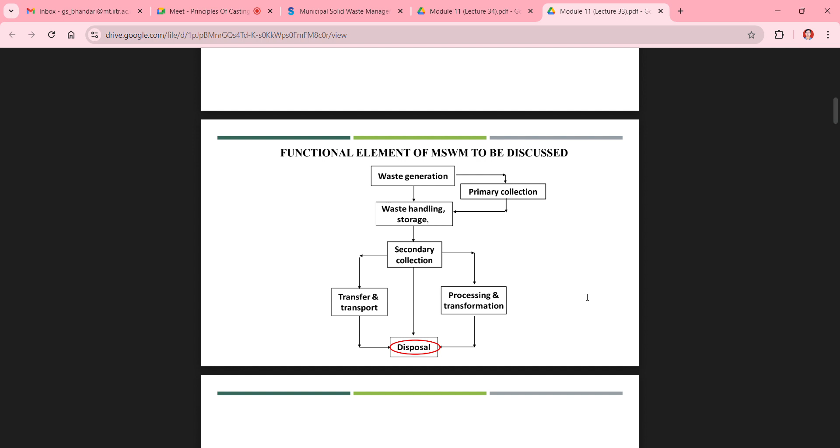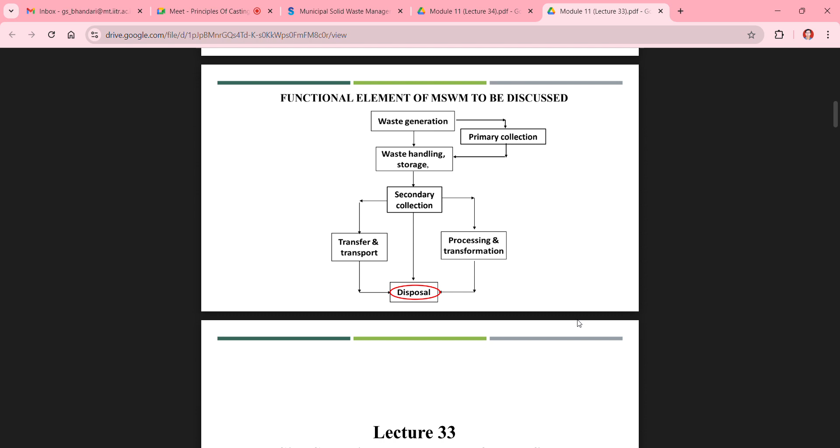So where are we going to dispose this waste? Obviously we are going to dispose it off in a landfill, because after the processing steps, it does not contain any useful material inside these wastes. So we will go for the landfilling of this municipal solid waste. For landfill, we need a site, and for site selection, we have to consider different factors before deciding the site for landfilling of municipal solid waste.

First, we will talk about the history of solid waste management in India. In earlier days, the solid waste was dumped in unoccupied land stretches, or we were burning the waste in the open so that it can be destroyed. But the problem with burning these wastes is that it will produce some greenhouse gases, and it will cause air pollution during the burning process.

In 1994, large scale flood due to heavy rain and clogged sewers resulted in a plague epidemic in Surat. Due to these hazardous health conditions, the philanthropist Almitra Patel filed a PIL in the Supreme Court, and that resulted in the formation of the Barman committee to improve solid waste management in the country. The Barman committee submitted the report to the Ministry of Environment and Forest, which introduced the special act of Municipal Solid Waste Management, known as Rules 2000. After that came the SWM Rules 2016, which is in practice nowadays.

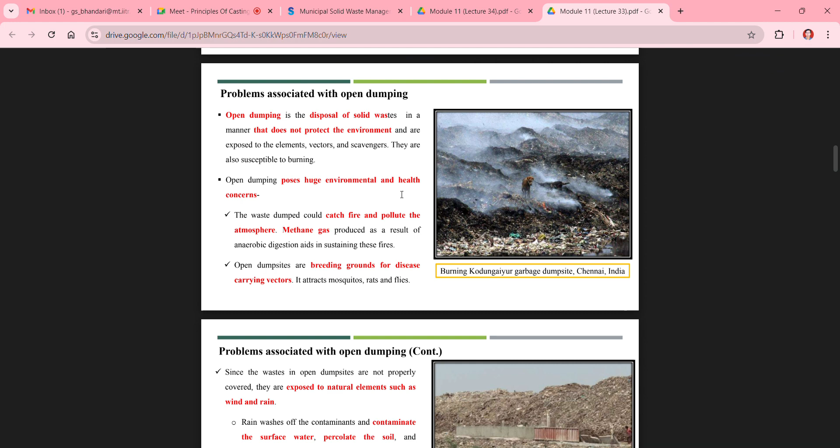There are many problems associated with open dumping of solid waste. Open dumping is a disposal of solid waste in a manner that does not protect the environment, and the waste is exposed to elements, vectors, and scavengers. It is also susceptible to burning. So instead of open dumping, we need to go for the landfilling of municipal solid waste in a proper manner, so we can inhibit the external vectors, scavengers, and different types of health hazards created due to the open dumping of municipal solid waste.

Open dumping poses huge environmental and health concerns. The waste dump could catch fire and pollute the atmosphere, and it can result in the formation of methane gas, which is very susceptible to fires. Open dump sites are breeding grounds for disease carrying vectors; they attract mosquitoes, rats, and fleas, which can result in different types of health hazards like plague or dengue.

Since the waste in open dump sites is not properly covered, it is exposed to natural elements such as wind and rain. If rain water comes into contact with this municipal solid waste, it will leach out the hazardous elements present in it, and that water will go into the groundwater and contaminate it, which will result in major health problems. Open dumping also decreases the quality of life of nearby residents and the local community.

Coming to the landfill, landfills are physical facilities used for the proper disposal of residual solid waste on the surface of the earth, considering different factors which inhibit health hazards during the disposal of municipal solid waste. A landfill includes monitoring of the incoming waste stream, and placement and compaction of waste so that it can be in a smaller area.

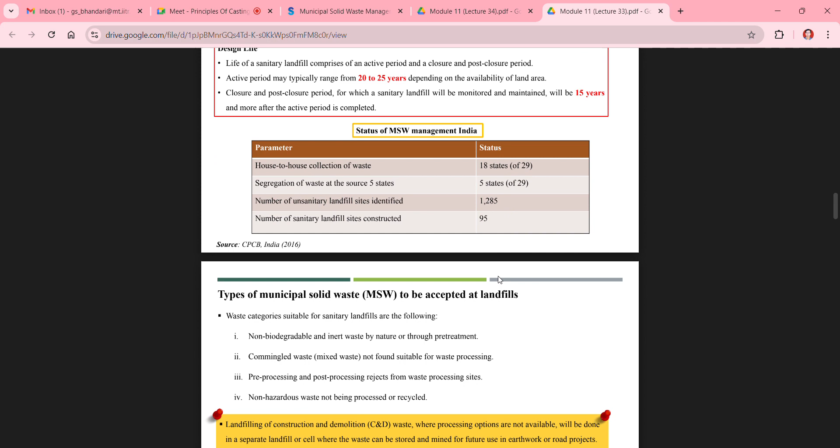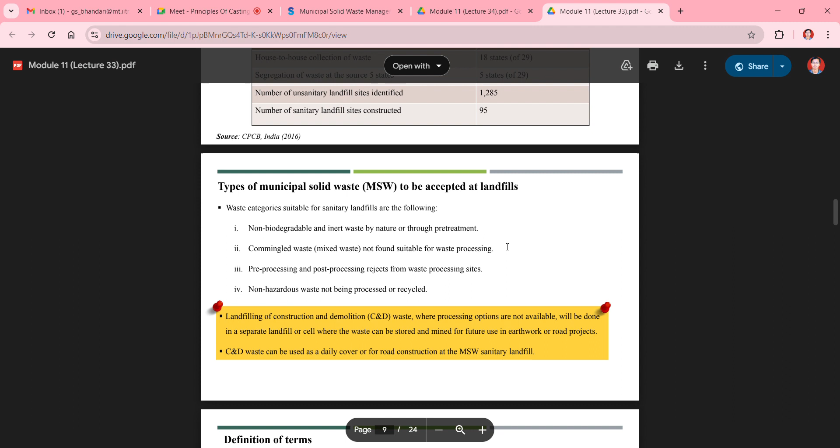Then, the types of municipal solid waste which can be accepted at landfill sites: there are different waste categories suitable for sanitary landfills, like non-biodegradable and inert waste, by nature or through pre-treatment. Then commingled waste, that is basically mixed waste not found suitable for waste processing. Then pre-processing and post-processing rejects from waste processing sites, and non-hazardous waste not being processed or recycled. So these are the different types of waste which can be accepted at the landfill site.

If we talk about non-biodegradable waste, we cannot convert it into biofuels with the help of anaerobic digestion, or into fertilizer material with the help of composting processes. Or there will be inert waste, which cannot be converted into any useful products. So that will go into the landfill sites.

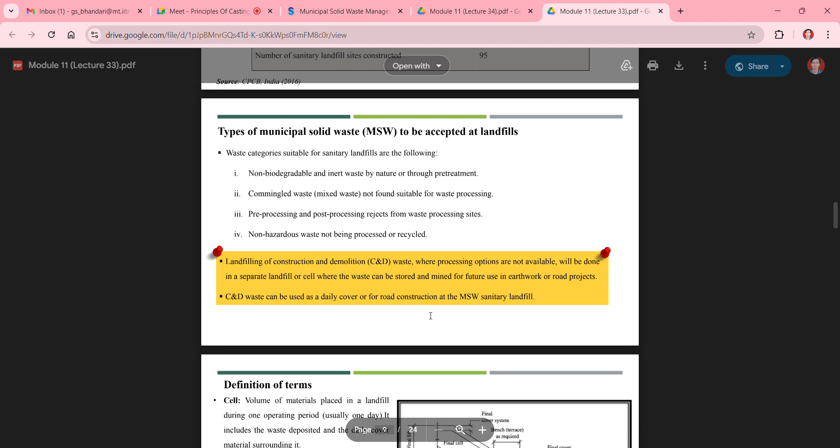Then there will be some pre-processing and post-processing waste rejects. In anaerobic digestion, we were creating reject material after the completion of the process. That post-processing reject will go into the landfill sites, because it is generally treated as inert material. Then non-hazardous waste which is not being processed, or which we were not able to recycle.

Then there are some different terms generally used in the formation of landfill sites, like cell, that is the volume of material placed in a landfill during one operating period, usually 1 day. It includes the waste deposited and the daily cover material surrounding it. So daily we have to fill some material. Okay, so we are going to create a cell.

We will calculate the area required for daily waste disposal, because we know the capacity that will be coming during municipal solid waste handling. So we are going to create a cell for the daily waste disposal, and after that cell creation, we will cover that disposed waste with some linings, so that it cannot come into contact with rainwater or something else which is going to leach the material, or which is going to create odor formation during the landfilling.

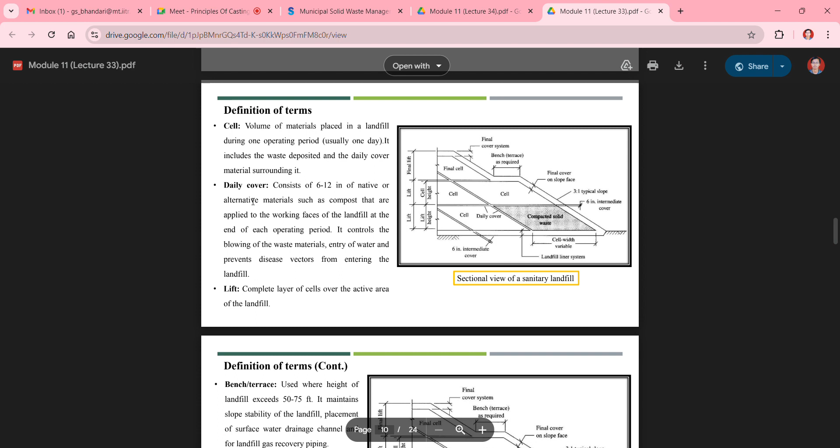Daily cover consists of 6 to 12 inches of native or alternative material such as compost that is applied to the working faces of the landfill at the end of each operating period. After filling the daily disposal, we cover it with the help of some organic material.

It controls the blowing of waste material, entry of water, and prevents disease vectors from entering the landfill, so it cannot come into contact with vectors or water every day. Then coming to the third term, that is known as lift. A complete layer of cells over the active area of landfill is known as the lift.

The lift height is usually around 6 to 7 feet. Another term is bench or terrace, used where the height of the landfill exceeds 50 to 75 feet. It maintains slope stability of the landfill, placement of surface water drainage channels, and landfill gas recovery piping.

As discussed, during landfilling there is no access to air for the waste disposed in the landfill site. Because this waste does not have proper contact with air, if there is some organic amount still present, it will go into anaerobic digestion, converting the municipal solid waste into different gases like CH4 or ammonia. Those gases have to be drained out from the landfill site properly so we can reuse them, prevent odor formation, and prevent major mishaps.

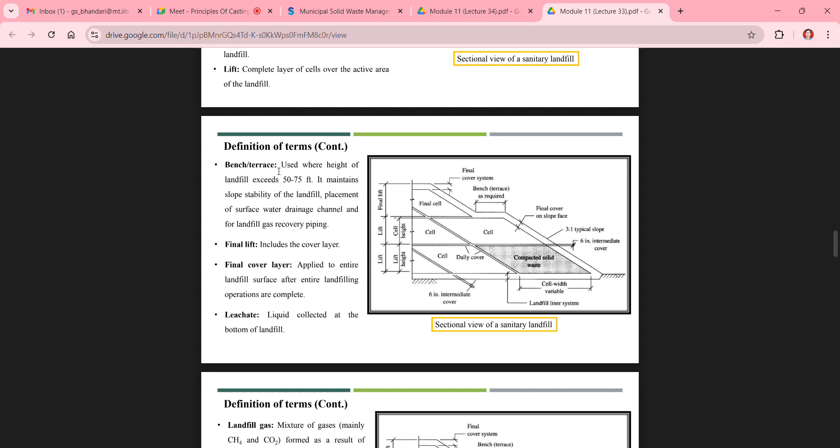The final lift includes the final cover layer, applied to the entire landfill surface after all landfilling operations are completed. We fill a landfill site for at least 10 to 15 years, and after that period, we cover the landfill site with the final cover layer, applied to prevent interaction of the municipal solid waste with rainwater, external vectors, or air.

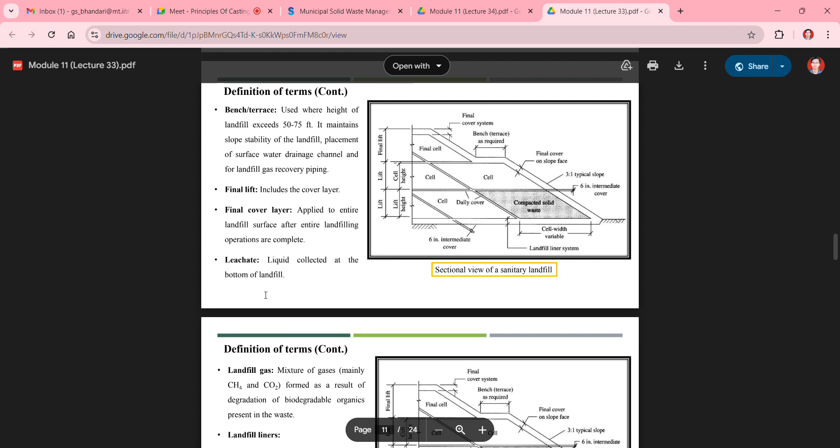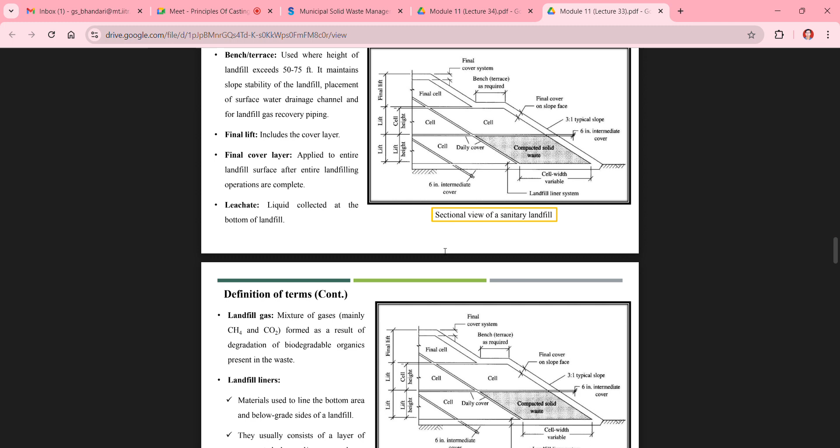Then leachate, which is a liquid collected at the bottom of the landfill. We have to provide a proper system for collection of the leachate material, which forms after the reaction of municipal solid waste with rainwater.

Then landfill gas, which is mainly a mixture of gases, mainly CH4 and CO2, formed as a result of degradation of biodegradable organics present in the waste material.

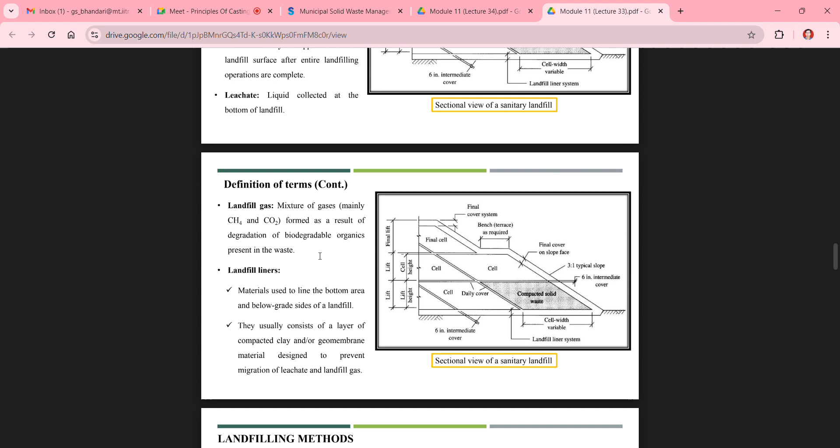Hello, Vasanta, you want to say something?

Coming to landfill liners, these are materials used to line the bottom area and below-grade sides of a landfill. They usually consist of a layer of compacted clay and/or geomembrane material designed to prevent migration of leachate and landfill gases into the groundwater.

If they transfer into the groundwater, they will contaminate it and create major health hazards. There are different types of landfilling methods, three in total: excavated cell or trench method, area method, and canyon or depression method.

In the excavated or trench method, this type is generally used where the groundwater table is not near the surface. Trenches are dug and lined with synthetic membrane liners like geomembranes, low permeable clay, or a combination of both, so the leachate water does not get in contact with the groundwater.

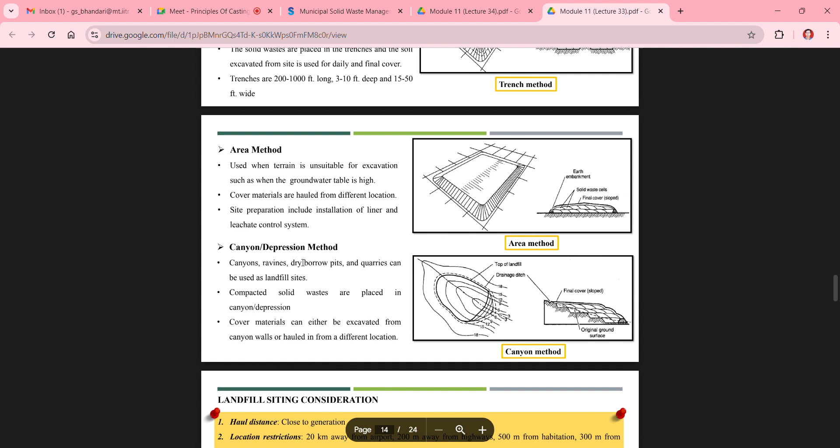Okay, then in that case, we have to go with the area method. In area method, the cover materials are hauled from different locations. Site preparation includes installation of liner and leachate control systems.

The third method is canyon or depression method. Canyons, ravines, dry borrow pits, and quarries can be used as landfill sites, and compacted solid waste is placed in canyon or depressions. In this method, you don't have to dig. You fill the waste material into a naturally available canyon, ravine, or dry borrow pit. Cover materials can either be excavated from canyon walls or hauled in from a different location.

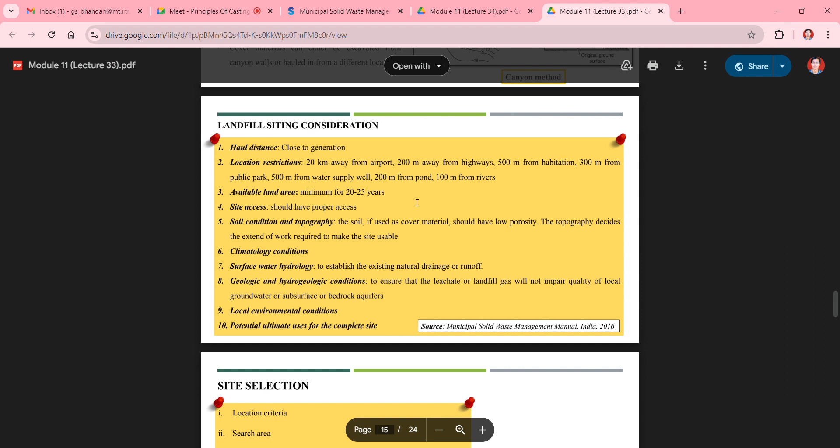There are some factors which need to be considered while deciding a landfill site. Haul distance has to be close to the generation site. Then location restrictions: it has to be at least 20 kilometers away from airport, 200 meters from highways, 500 meters from habitation, 300 meters from public park, 500 meters from water supply well so it cannot contaminate the groundwater, 200 meters from pond, and 100 meters from rivers.

Then available land area, that has to be sufficient for at least 20 to 25 years, because a landfill site will take at least 20 to 25 years to properly fill up with municipal solid waste material. And after that, you also have to monitor that landfill site for at least 10 to 15 years more. Then site access, it should have proper access to the road.

So that transportation can be easily done. Then soil condition and topography: the soil, if used as cover material, should have low porosity, and the topography decides the extent of work required to make the site usable.

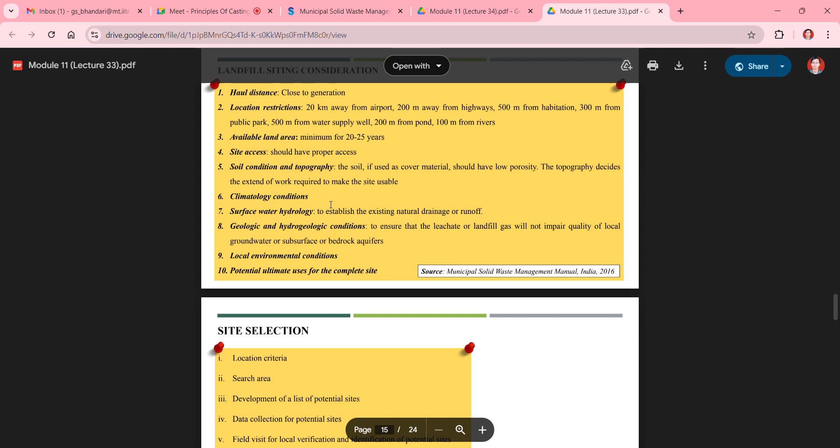Then we have to take into consideration some climatology conditions, surface water hydrology to establish the existing natural drainage or runoff, and geologic and hydrogeologic conditions to ensure that the leachate or landfill gas will not impair quality of local groundwater or subsurface bedrock aquifers.

Then we have to take into consideration some local environmental conditions, and potential ultimate uses for the complete site. Because after landfilling, once 25 to 30 years are over, we cannot leave that site as it is. So we have to consider the potential ultimate uses of that complete site after the landfilling process is over.

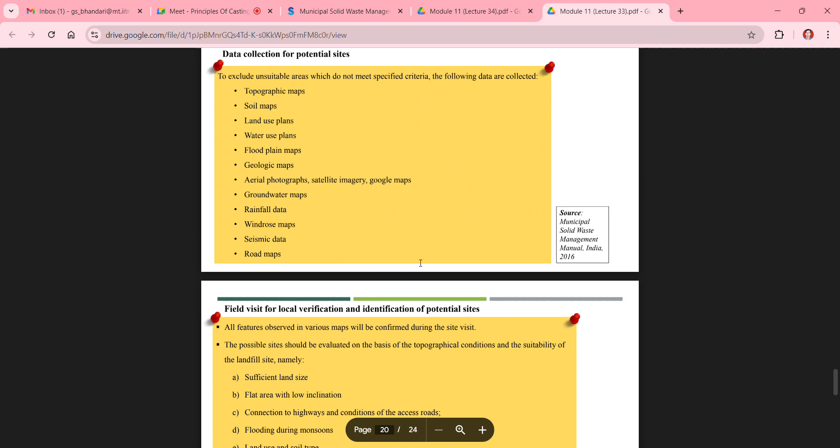We have already discussed these things: search area, data collection for potential sites, field visits.

Sir, can you please zoom in a little bit on the PPT? It is okay now. Yes, sir, it's fine. Okay.

We have talked about the different types of landfill sites and what factors we need to take into consideration while deciding a proper landfill site. After deciding the proper landfill site, we also have to install the leachate collection and gas treatment systems in that landfill site for the proper disposal of the leachate and the gases produced during the landfilling of municipal solid waste.

There are two most common problems associated with landfill sites. One is landfill gas. Organic material such as wet waste is usually compacted when put into landfills, and due to improper oxygen content, that organic material goes into the anaerobic digestion process. This anaerobic digestion process results in the production of CO2 and CH4 gases during landfilling, which have to be properly captured at the landfill site.

Otherwise, these gases are a major part of the greenhouse gases and will create a major greenhouse effect and major air pollution. So we have to properly create a system for the capture of these landfill gases. There are two major advantages after capturing these gases: one, we are inhibiting air pollution and the greenhouse effect; second, the major content of these gases includes around 60 to 70% methane gas, which can be reused as a biofuel material for different purposes.

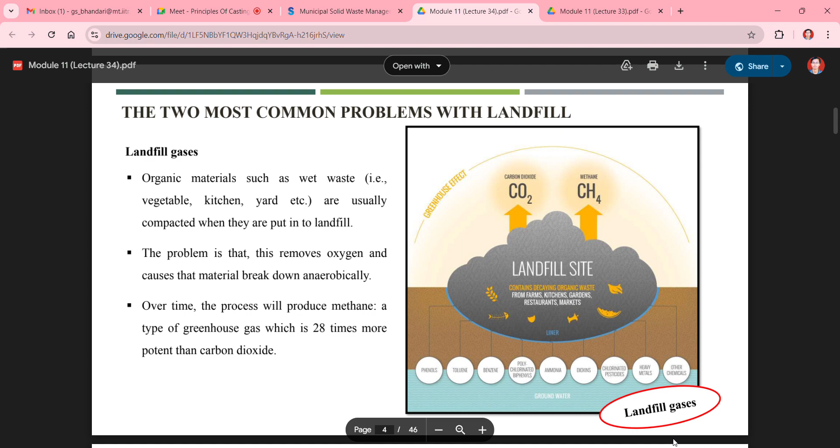After the capture of these gases, we can provide some economy also, after selling these gases.

There will be some complex reactions which will occur during the landfilling of these sites, like hydrolysis. These types of reactions we have already discussed during the anaerobic digestion process. So these organic materials first go into the hydrolysis process, followed by fermentation, and then acetate formation. After acetate formation, that acetate again decomposes into CH4 and CO2 gas formation. So the same reactions which were occurring during the anaerobic digestion process will occur in these landfill sites.

Typical phases of landfill gas and leachate: as we increase the volume, there is first phase, second phase, third phase. In the third phase, the stabilization gas production will be at maximum. We have plotted the stabilization gas production with respect to the gas composition, percent by volume, and chemical oxygen demand.

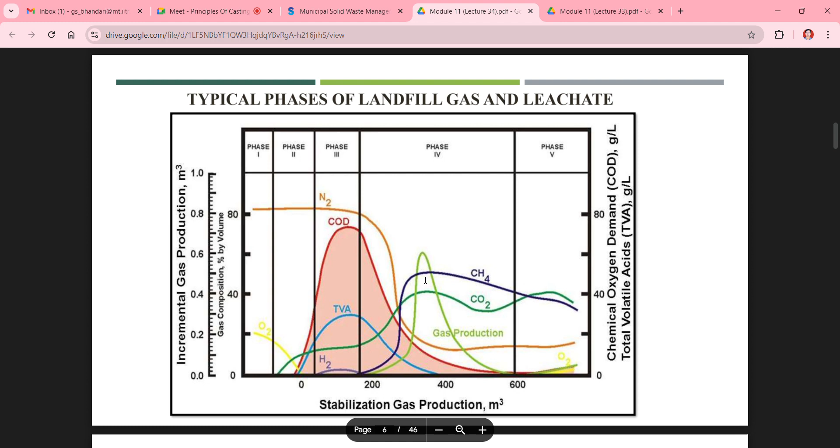The CH4 gas production can go up to a maximum of around 400 meter cube, at a gas composition where a maximum CH4 content of 45 to 50% can be achieved.

Then there are different factors which influence the leachate generation process during landfilling. Leachate varies widely depending on the age of the landfill, type of waste, and composition of that waste material—whether it contains non-biodegradable material or heavy metals. Heavy metals are easily leachable with rainwater, so that composition plays a major role in the leachate composition.

Then what are the environmental conditions, like temperature? In Delhi, the maximum surrounding temperature near landfill sites can go up to 49 or 50 degrees, and inside the landfill it can be around 80 or 90 degrees Celsius. In a landfill site in Jammu and Kashmir, maximum surrounding temperature can be only 30 or 40 degrees, and inside the landfill it can go up to around 50 or 60 degrees Celsius. So temperature plays a major role during leachate operations.

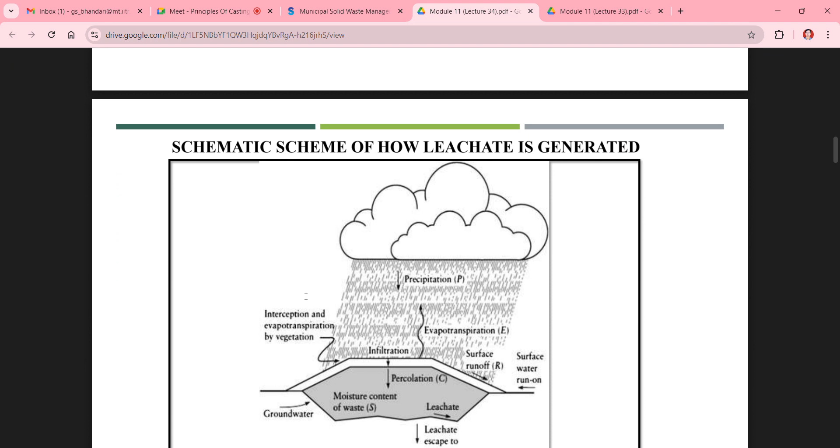So this is a schematic of how leachate is generated. Here we can see rainfall, or we can say precipitation. This rainfall is going to infiltrate into the landfill site. Then there will be percolation, then moisture content of waste, and it will create the leachate.

And some leachate can escape to the environment, like into the land, into the soil which is on the bottom side of the landfill, some will be collected as surface runoff, and some will go as leachate.

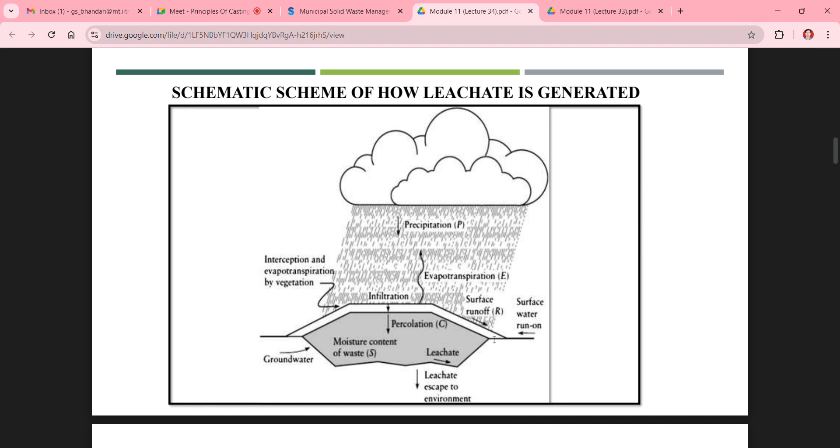Okay, so there are different factors that will influence the leachate quality, like refuse composition. Quality variation is higher for putrescible waste than for non-putrescible waste. Then elapsed time: leachate quality varies with time. In general, overall quality of leachate generated in 1 year will be less strong than previous years.

Then ambient temperature, which will affect both bacterial growth and chemical reactions during the landfilling. Then available moisture, because water plays a significant role in biodegradation and subsequent leaching of chemicals out of a waste. Then precipitation: the amount of rain falling on the landfill influences the leachate quality significantly.

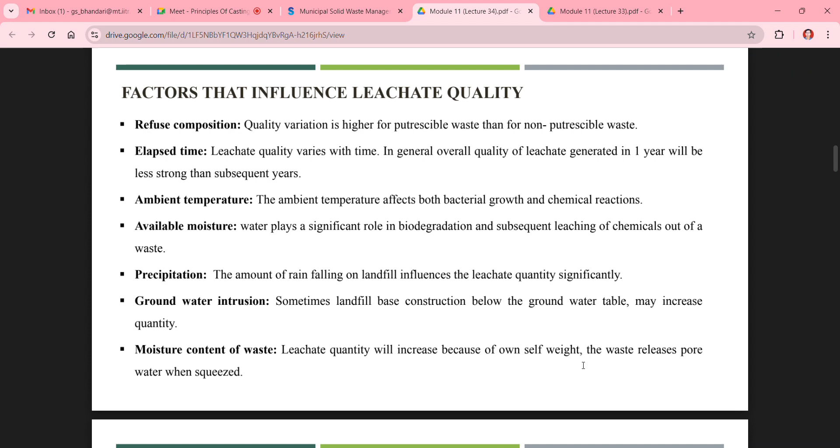Then groundwater intrusion: sometimes landfill base construction below the groundwater table may increase the quantity of the leachate. Then moisture content of waste: leachate quantity will increase because of own weight. The waste releases pore water when squeezed.

Sir, what is the meaning of refuse composition? First point, leachate quality, like putrescible waste and non-putrescible waste. I didn't understand. It's like we have already talked about the decomposition processes of the solid waste. Municipal solid waste contains different categories. It can contain inert waste from the construction industry, dry leaves, inert waste like dirt sweepings from the streets, or kitchen waste.

Okay, so what types of different content are coming into that refuse composition. If we are going for the composting process, or the anaerobic digestion process before going for landfilling, that will decide the refuse composition. So if it is going to contain inert waste material, that inert or hazardous waste will contain some heavy metals.

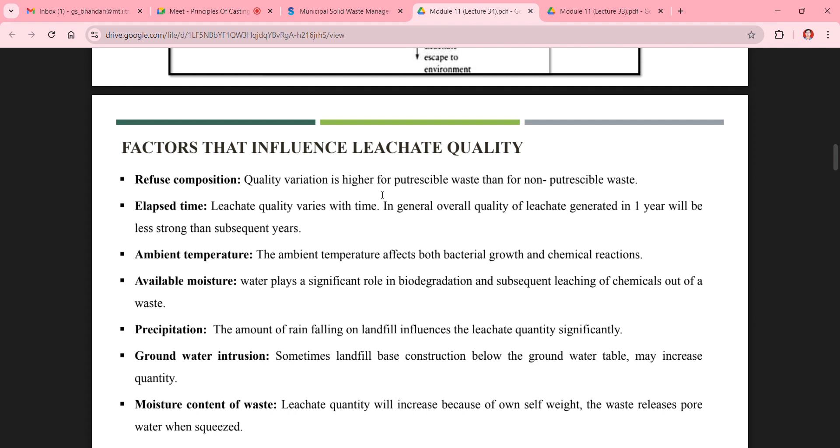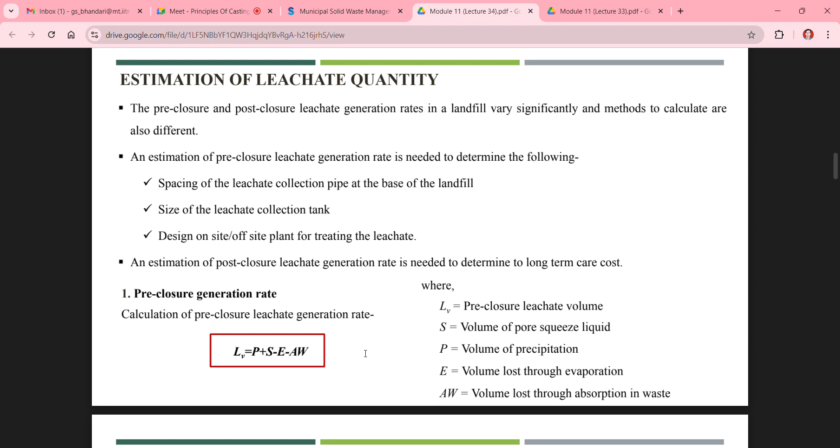Okay, so with the monitoring of that leachate quality or the gases generation during that tenure, we will be able to decide if we have to finally close that landfill site or not. Okay, on the basis of the leachate quality or quantity, we can decide the time period of the closure of

that landfill site. Then post-closure generation: after the construction of the final cover, only the rainwater can infiltrate into the waste and generate leachate. Five approaches are available to predict the long-term leachate generation rate. So after the post-closure, okay, so pre-closure, like we have talked about, pre-closure time period of around 15 years, then post-closure time period of around 10 to 15 years.

So after the pre-closure tenure is over, 15 years of the landfilling is over, we will provide a proper membrane, or we can say a proper cover, on that landfill site. So that after that proper covering of that landfill site, only a small amount of rainwater will be able to infiltrate inside the landfill site to generate the leachate.

Okay, most of the rainwater will fall off from that geomembrane only, because we are providing that geomembrane over the landfill site to prevent the moisture absorption after the pre-closure period of landfilling. So there are 5 approaches which are available to predict the long-term leachate generation rate. That is water balance method, computer modeling in conjunction with water balance method, empirical equations, mathematical modeling, and direct infiltration measurements.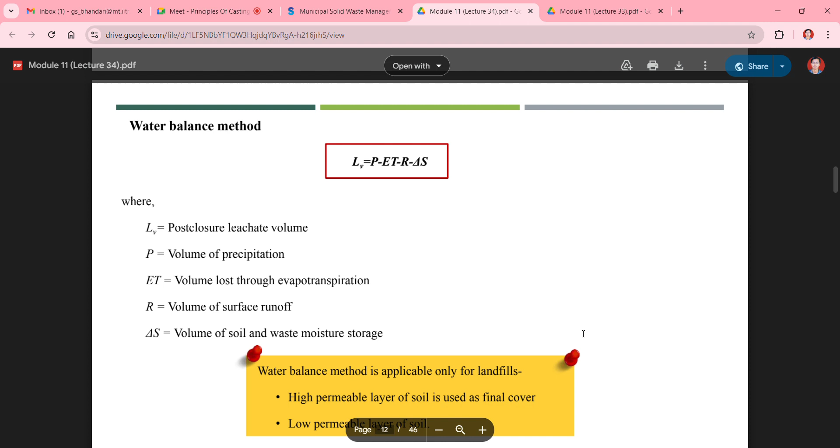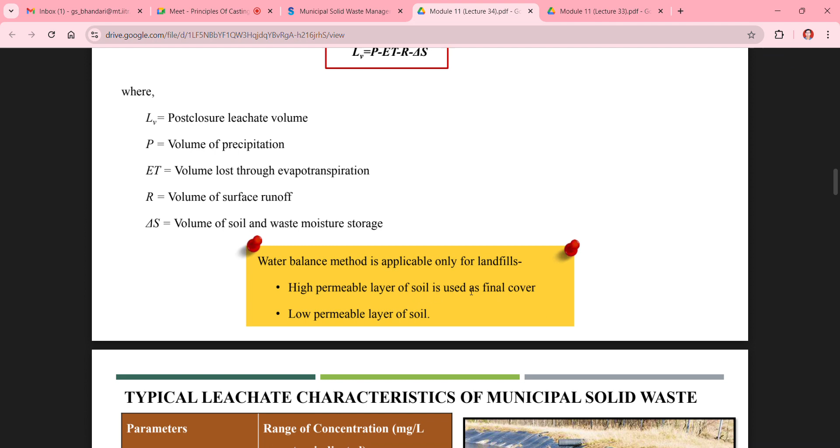Then coming to water balance methods, an empirical formula is Lv equal to P minus ET minus R minus delta S. So Lv is post-closure leachate volume, P is volume of precipitation, which is decided with the help of the rainfall. Then ET is volume lost through evapotranspiration. Then R is volume of surface runoff. Delta S is volume of soil and waste moisture storage. So water balance method is applicable only for the landfill sites which have a high permeable layer of soil as a final cover, or low permeable layer of soil.

Then typical leachate characteristics of municipal solid waste: the pH value of that typical leachate will vary from 3.7 to 8.9, and electrical conductivity will be in a wider range, around 480 to 72,500 microsiemens per centimeter. Then biological oxygen demand will vary from 0 to 1,95,000. Then chemical oxygen demand will vary from 6.6 to 99,000. Iron content will vary from 0 to 4,000 ppm. Potassium content 0 to 3,200 ppm, and magnesium content will be around 4 to 780 ppm.

Then we can see a leachate is flowing through a pipe in a sanitary landfill site. So we have created a pond for the leachate collection. Then this leachate will be treated in this pond before going for the proper disposal of this leachate content.

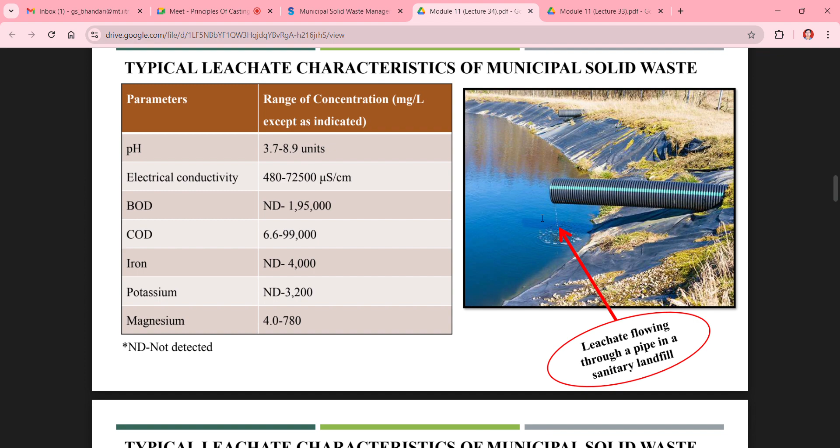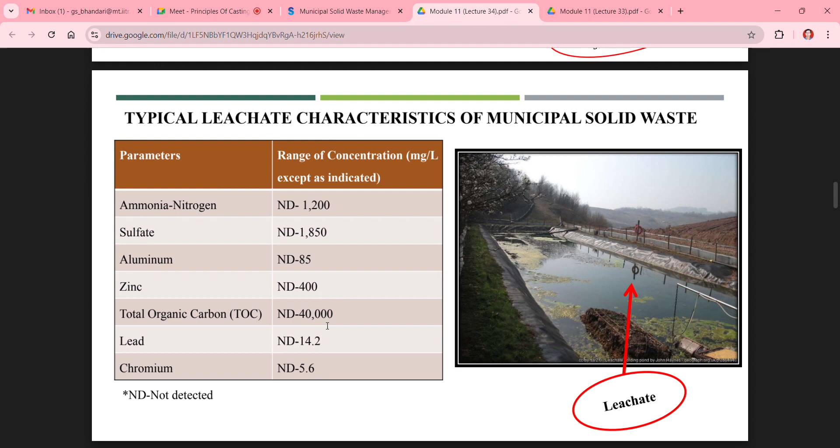So this is continuation from this typical leachate characteristic. The ammonia or nitrogen generation will be around 0 to 1200 ppm, sulfate 0 to 1,850. So these are different numbers which can vary according to the municipal waste characteristics. Whatever type of municipal solid waste is landfilled, the characteristic of the leachate will depend on that municipal solid waste quality.

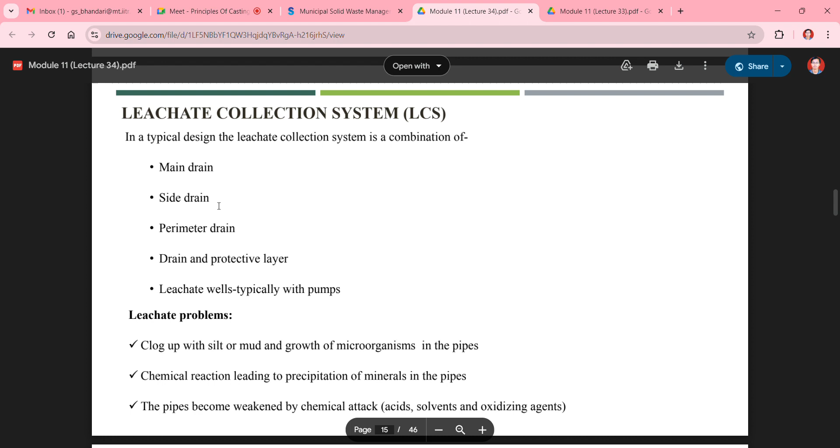Then coming to leachate collection systems. So a typical design of the leachate collection system is going to be a combination of main drain, side drain, perimeter drain, drain and protective layer, then leachate wells, typically with pumps. So there are different leachate problems: leachate can clog up with silt or mud and growth of microorganisms in the pipes, or chemical reactions leading to precipitation of minerals in the pipes.

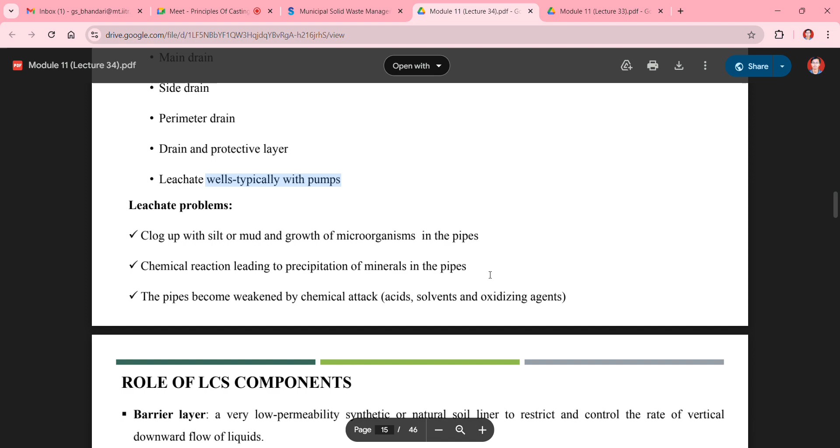Okay, so we have talked about the formation of the magnesium, iron and potassium content. So what will happen? These metals can precipitate in the pipes which are required for the leachate flow from the landfill site. So that will create the clogging up of the material inside these pipes. The pipes become weakened by chemical attacks like acids or solvents or oxidizing agents.

Then role of LCS. So there are different roles of these LCS components. First one is barrier layer, a very low permeability synthetic or natural soil liner to restrict and control the rate of vertical downward flow of liquid. So this layer will be provided on the top of the landfill site. That is very low permeability synthetic or natural soil liner, which will restrict and control the rate of vertical downward flow of liquids.

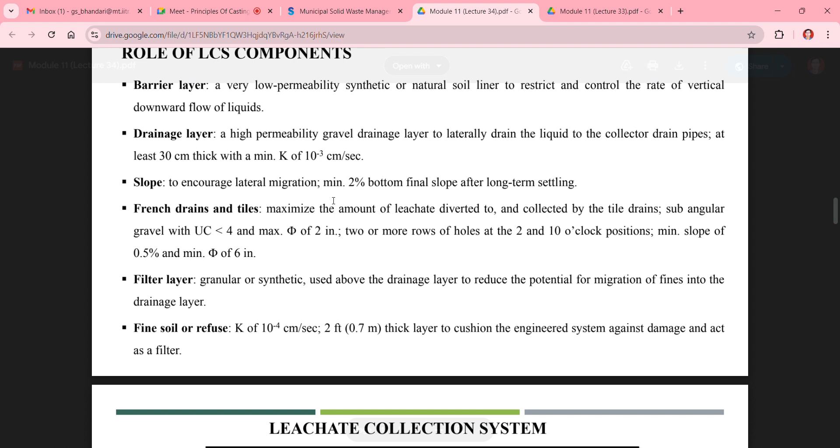Then drainage layer, a high permeability gravel drainage layer to laterally drain the liquid to the collector drain pipes, at least 30 centimeter thick with a minimum K of 10 to the power minus 3 centimeter per second. Then slope to encourage lateral migration, minimum 2% bottom final slope after long-term settling. Then French drains and tiles which will maximize the amount of leachate diverted to and collected by the tile drains, subangular gravels. So these are the design process of a landfill site. In that way, we have to properly design a landfill site to create a proper leachate collection system.

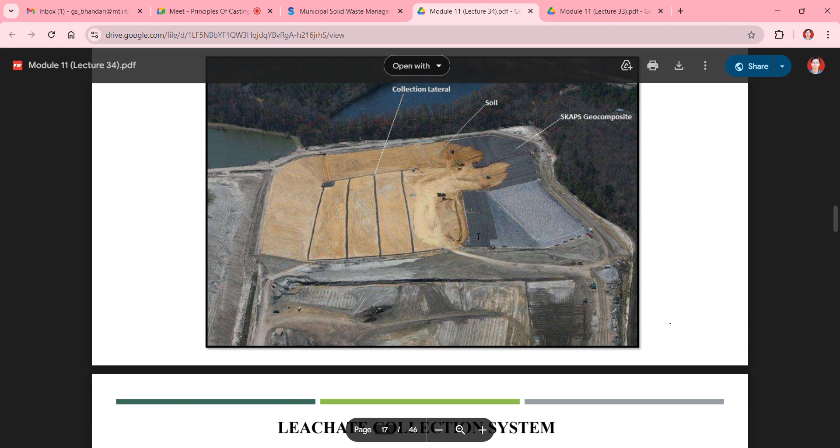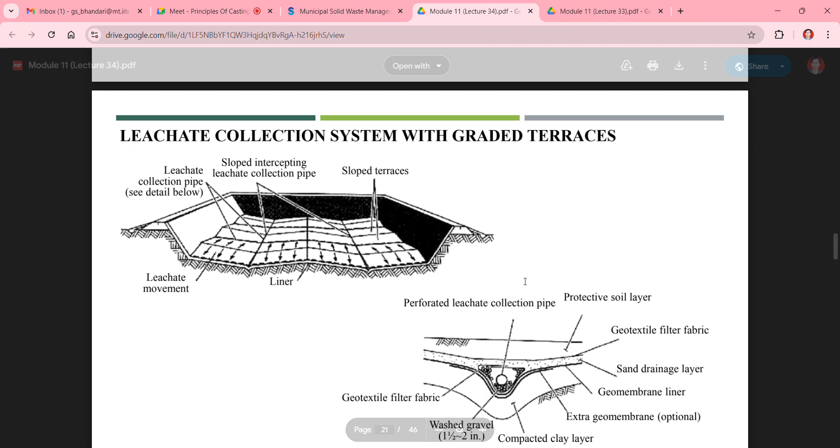So this is a typical leachate collection system. Then there are some figures of schematic of various leachate discharge pathways. Then coming to leachate collection systems with graded terrace, leachate seep remediations. These are some figures of different types of leachate collection system.

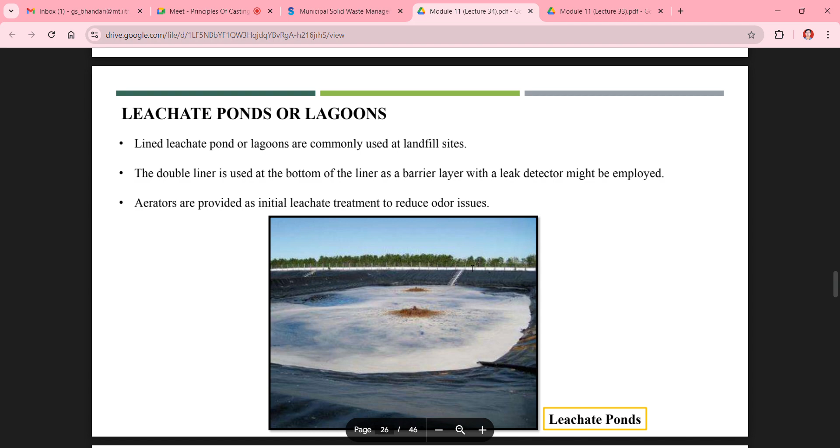Then for every landfill site we have to create leachate ponds, or we can say lagoons, which will be required for the collection of the leachate generated in that landfill site, so we can provide some proper treatment to that leachate before the final disposal of these leachate liquids.

So lined leachate ponds or lagoons are commonly used at landfill sites. The double liner is used at the bottom of the liner as a barrier layer, with a leak detector might be employed. Then aerators are provided as initial leachate treatment to reduce odor issues.

We have to provide them because, as we have already discussed, there will be some amount of nitrogen and sulfur and some ammonia in these leachate liquids, and for the proper decomposition of these acids or base contents, we have to provide the proper oxygen content, which we termed as chemical oxygen demand, for the proper reaction to happen there.

Okay, so if we are going to provide the proper amount of oxygen into these leachates, what will happen? The ammonia is going to convert into NO2 gases, and sulfur is going to convert into sulfur gas, and methane content, if some organic content is there, that is going to convert into CO2 gases.

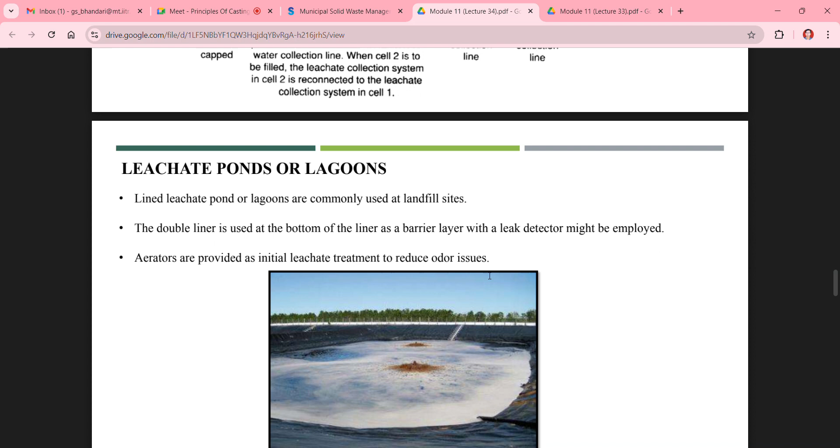Okay, so proper aeration has to be provided, and it will also help in reducing odor issues which will be created due to the improper decomposition of this leachate liquid if we are not going to provide the proper oxygen content to that liquid.

So we have to provide some leachate storage tanks or structural basins with primary construction materials including steel, fiberglass or concrete. So the construction material of these leachate tanks has to be inert, because the pH range of the leachate liquid will vary from 3.5 to 8.5. So it has to be inert material so that it cannot react with the leachate solution.

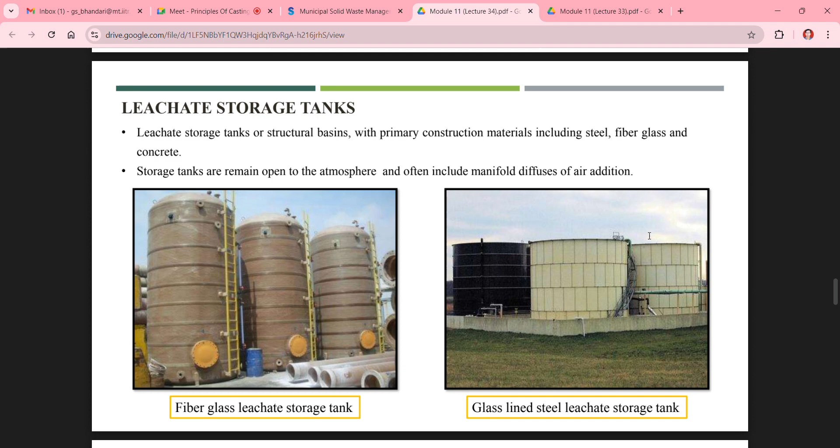Storage tanks remain open to the atmosphere and often include manifold diffusers of air addition for the proper decomposition of the leachate liquid.

Then coming to leachate control, the best ways to control leachate in landfills are strict stormwater and runoff water control, and proper segregation of wet and dry waste, because if we are not going to landfill any wet waste into the landfill sites, the moisture amount of that landfill site will be on the lower side, resulting in lower leachate formation. So with proper segregation of wet and dry waste, wet waste can go for anaerobic digestion or composting processes, and dry waste or inert waste can go for the landfilling of the municipal solid waste.

And we can provide aerobic landfill technology, like a proper oxygen aeration system in the landfill sites. Due to that proper aeration, there will be proper decomposition of the materials inside that landfill site, so gaseous generation will be on the higher side, and those gases can be collected as a fuel material.

To restrict the storm and runoff water, use proper liner systems. Sorting into waste categories like wet and dry waste leads to reduced leachate generation from the landfills.

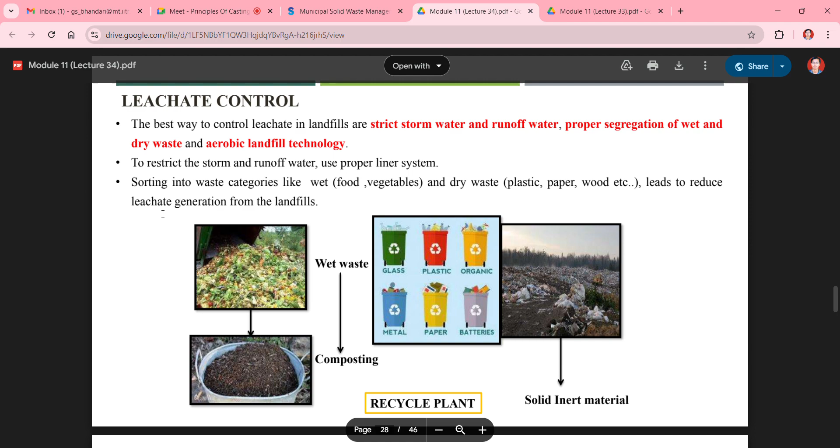Then design of landfill liners. There are different designs of landfill liners which are used for the leachate control during the landfill sites. First is geotextile, which is a thin synthetic material which is used to minimize the intermixing of the soil and sand or gravel layers with the municipal solid waste.

Then geonet, together with the geotextile, the drainage layer to convey leachate to the leachate collection system. So that layer will inhibit the absorption of the leachate into the groundwater or soil. Okay. Then coming to the next one, geomembrane. That is a synthetic material which serves as an impervious barrier to the movement of the leachate and landfill gas.

So this geomembrane will inhibit the absorption of the leachate or landfill gases into the soil. Or if we want to create a proper system, after one batch we will provide a geomembrane. Okay, then we will fill up the waste up to some height like 3 or 4 meters, then again we

will provide a geomembrane, and between those batch areas, between those plots of 1 or 2 meter height, we are going to provide some movement system for the leachate and landfill gases. So that will create a separation within the landfill site itself. Okay. Then clay liners, which may crack due to desiccation, and it needs to be ensured that clay does not dry out as it is being placed.

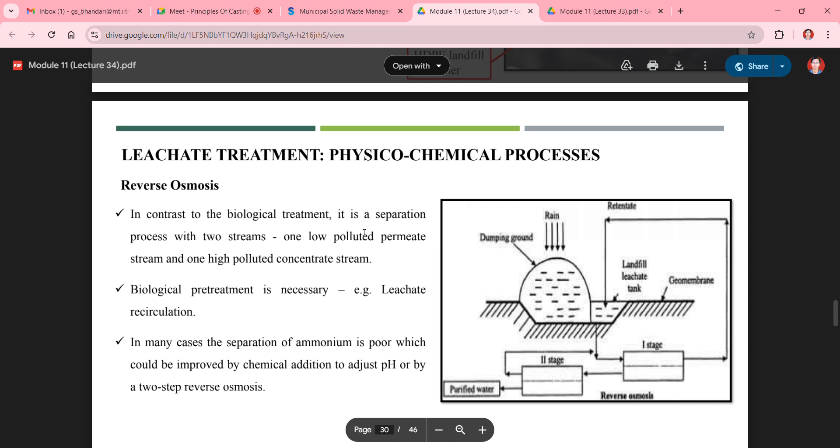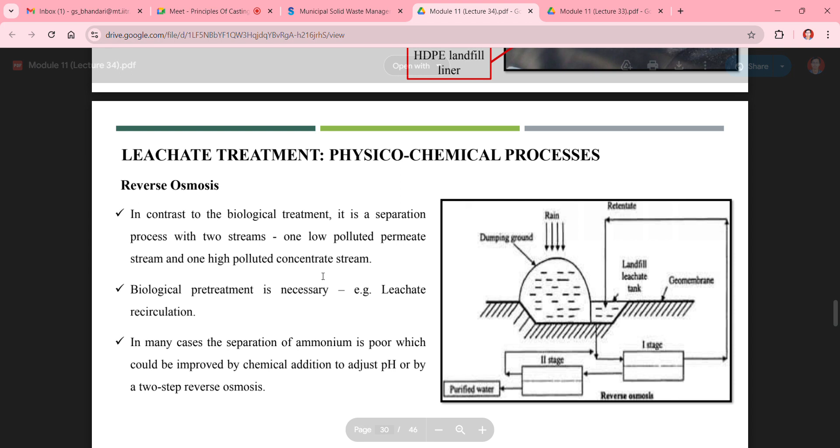Then leachate treatment. Before going for the disposal of this leachate, we have to go for some leachate treatment process. So there are some physicochemical processes like the reverse osmosis process. In contrast to biological treatment, it is a separation process with two streams, one low polluted permeate stream and one high polluted concentrate stream. So we have to go for different types of processes like reverse osmosis.

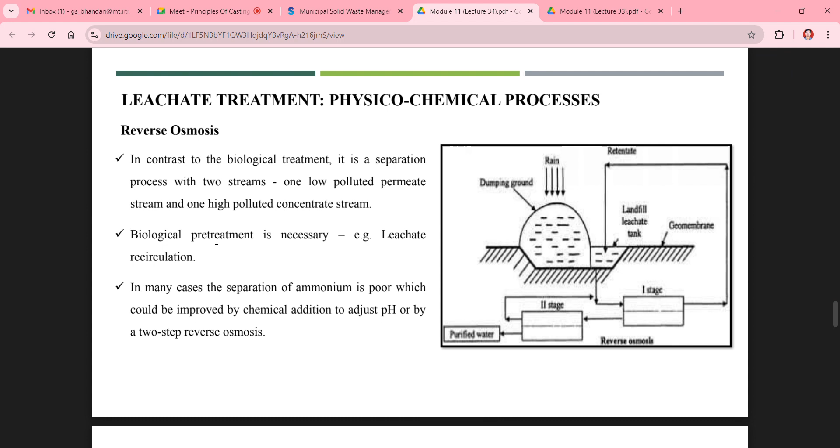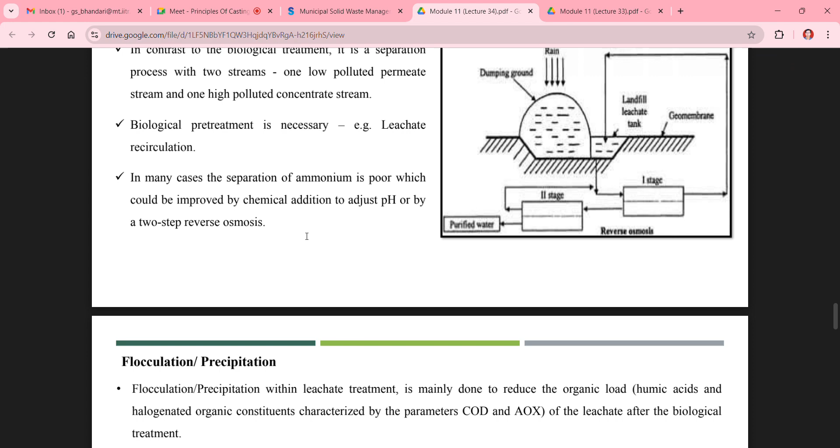Then there is a requirement of some biological treatments, like we will provide some oxygen content into that material for fulfilling the biological oxygen demand, or we can say chemical oxygen demand of that leachate system. Then in many cases the separation of ammonium is poor, which could be improved by chemical addition to adjust pH, or by a two-step reverse osmosis process.

Then flocculation or precipitation process, because these leachates will contain some amount of slimes in that leach material, which will be of very small size, which cannot be segregated with the help of filtration or something like that, because the size of those components is very small. So we will go with some flocculation process.

So what the flocculation reagent will do, it will create clusters of the particles inside that leachate. And after creating the clusters of those particles, we can go with some precipitation process, or we can go with some filtration process to remove those particles from that leachate system.

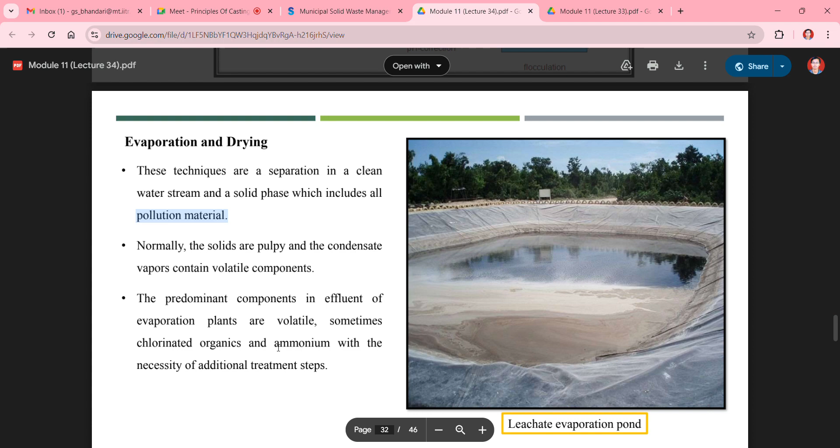Then evaporation and drying. These techniques are a separation into a clean water stream and a solid phase, which includes all pollution material. Normally the solids are pulpy and the condensate vapors contain volatile components. The predominant components in effluent of evaporation plants are volatiles, sometimes chlorinated organics and ammoniums, with the necessity of additional treatment steps.

Then we can go with aerobic biological treatment process for leachate pre-treatment. So a simple leachate treatment system in which we are going to provide the proper oxygen content, and with the help of some bacteria which can develop per unit time as the number of species that are transported out of the lagoon with the effluent.

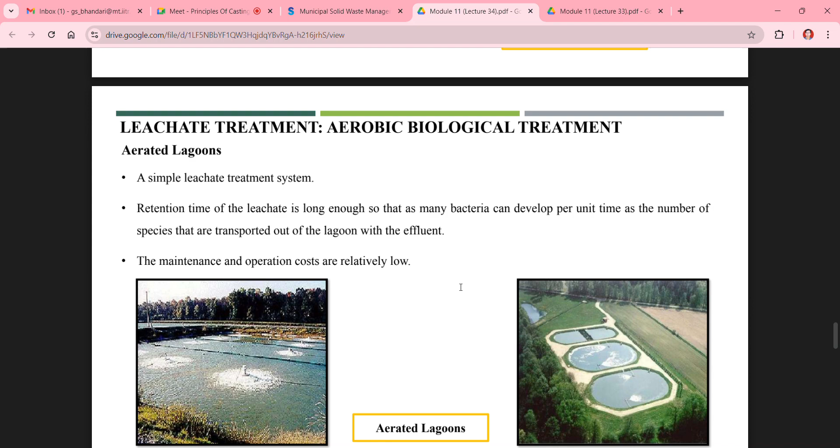So with the help of those bacteria and with the help of the oxygen, we can properly decompose the organic content present inside that leachate material, and after the decomposition of that organic content, that water can be disposed of in the rivers, or we can dispose it off in the groundwater system.

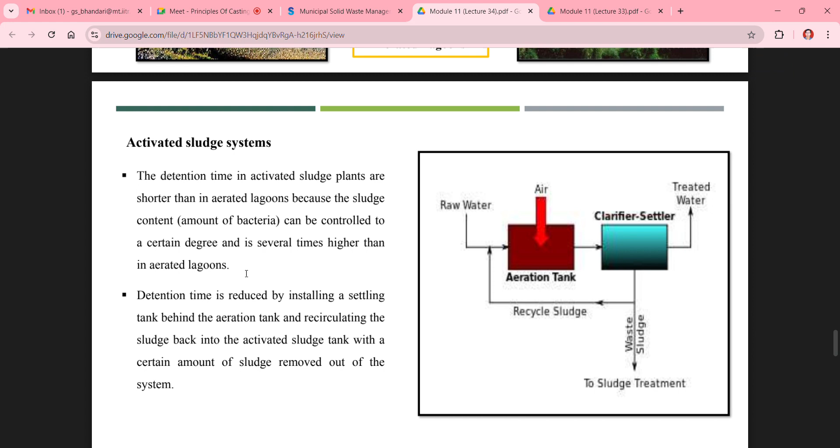Then there are some activated sludge systems also. The detention time in activated sludge plants is shorter than in aerated lagoons, because the sludge content can be controlled to a certain degree and is several times higher than in aerated lagoons. Detention time is reduced by installing a settling tank behind the aeration tank and recirculating the sludge back into the activated sludge tank with a certain amount of sludge removed out of the system.

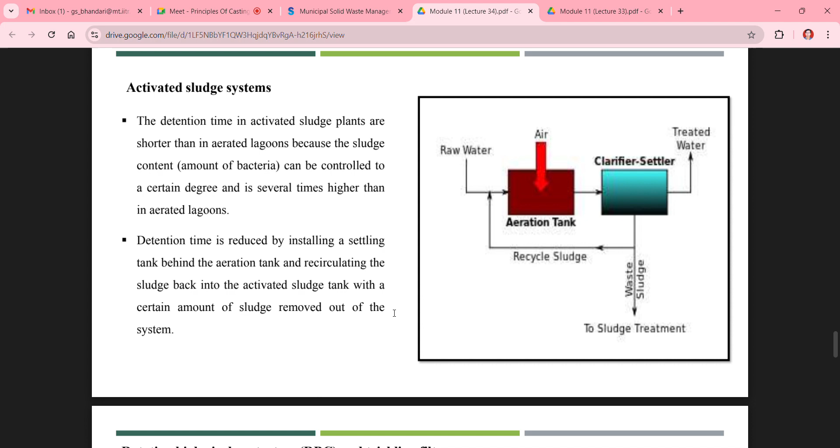Then rotating biological contactors and trickling filters. So in these types of systems also, we are providing the proper aeration system for the decomposition of the leachate material. Then leachate treatment, anaerobic biological treatment. With the help of anaerobic biological treatment, we can convert that leachate into fuel gases. Okay.

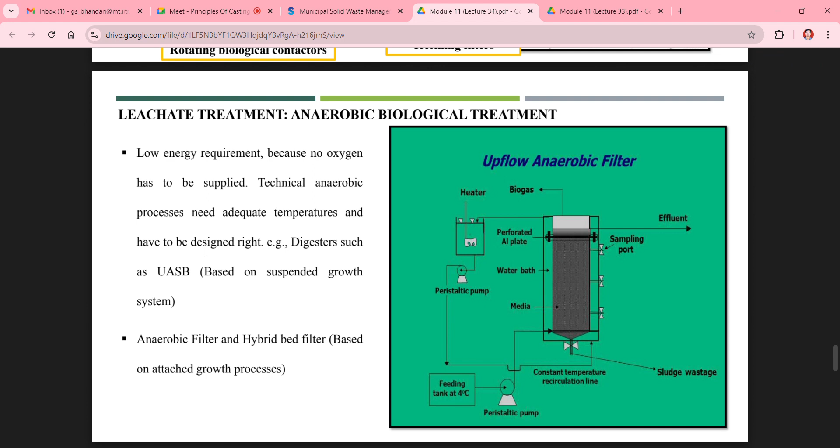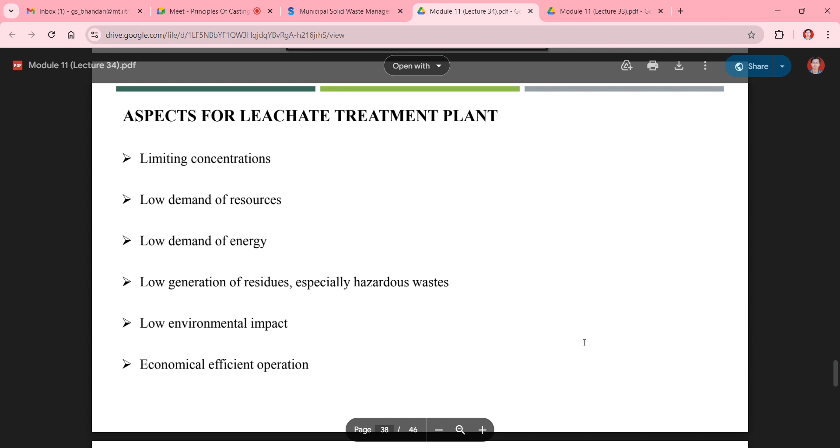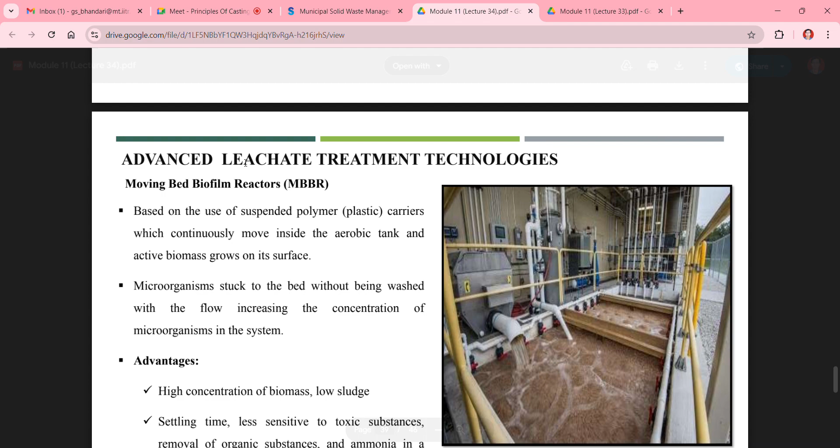Then they have low environmental impact and are economical. They are economically efficient operations. Then there are some advanced leachate treatment technologies like moving bed biofilm reactors, then membrane bioreactors. These types of reactors have some advantages and disadvantages. But the main disadvantage with these types of reactors is high capital cost. You have to provide proper machinery systems so that the reactors can work.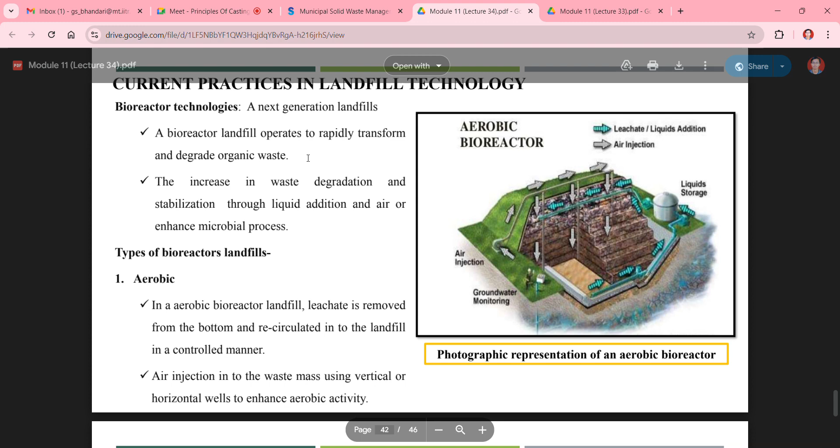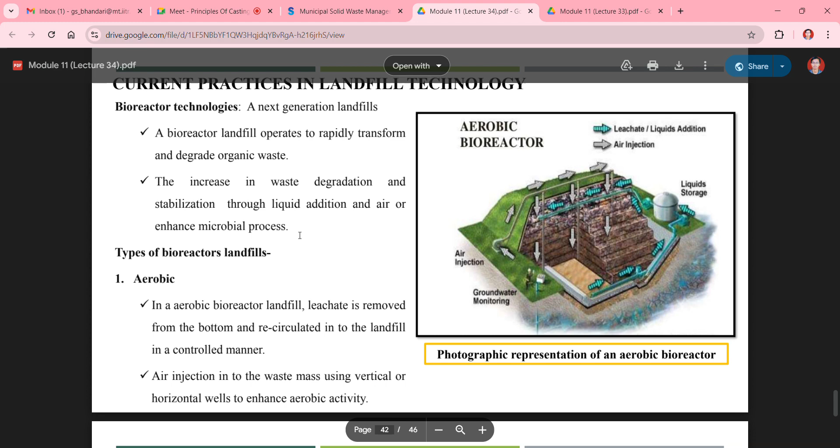Then current practices in landfill technologies: one is bioreactor technologies, a next generation landfill. A bioreactor landfill operates to rapidly transform and degrade organic waste, increasing waste degradation and stabilization through liquid addition and air or enhanced microbial processes. So there are different types of bioreactor landfills.

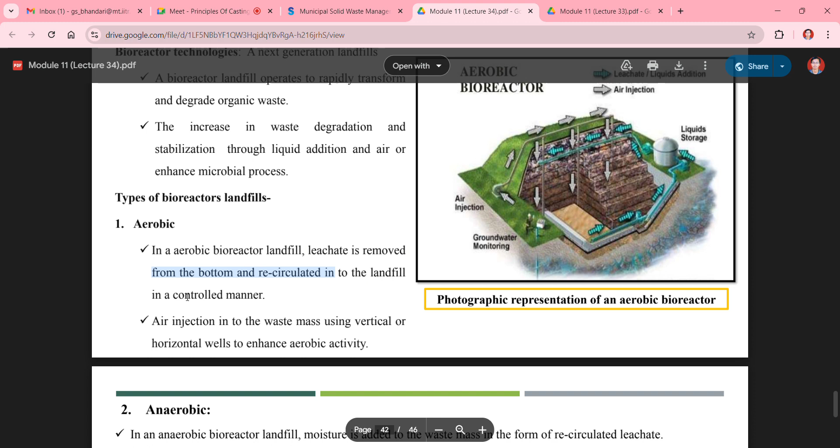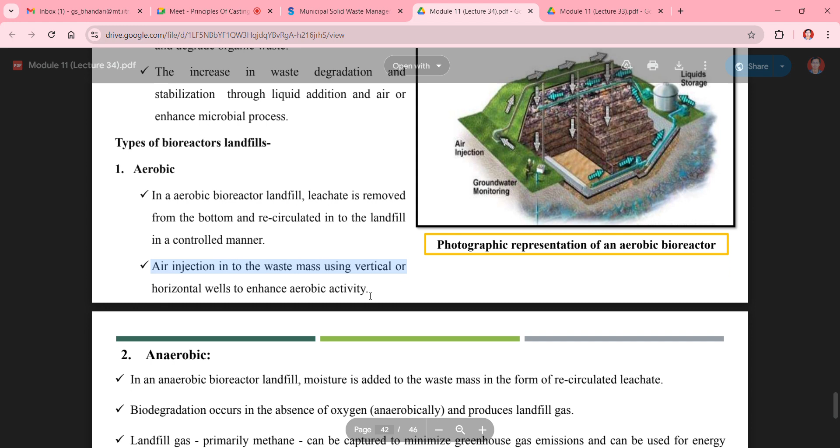One is aerobic bioreactor. In aerobic bioreactor landfills, as the name suggests, we provide a proper aeration system into that landfill site. Leachate is removed from the bottom and recirculated into the landfill in a controlled manner for the proper reaction to happen inside that bioreactor system. Then air is injected into the waste mass using vertical or horizontal wells to enhance aerobic activities.

Then in anaerobic bioreactor, no air will be provided. In an anaerobic bioreactor landfill, moisture is added to the waste mass in the form of recirculated leachate. As we are not going to provide any air, the organic content inside that landfill site will go under anaerobic digestion, which results in the formation of biofuel gases like CH4 or CO2. So biodegradation occurs in the absence of oxygen and produces landfill gas. Landfill gas, primarily methane, can be captured to minimize greenhouse gas emission and can be used for energy projects.

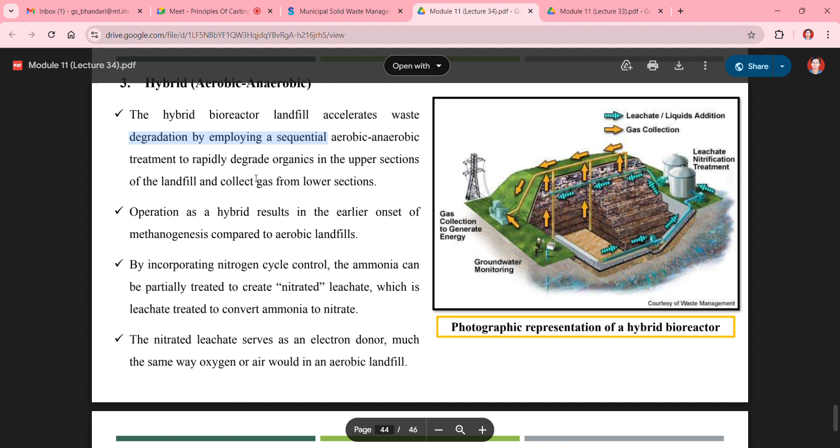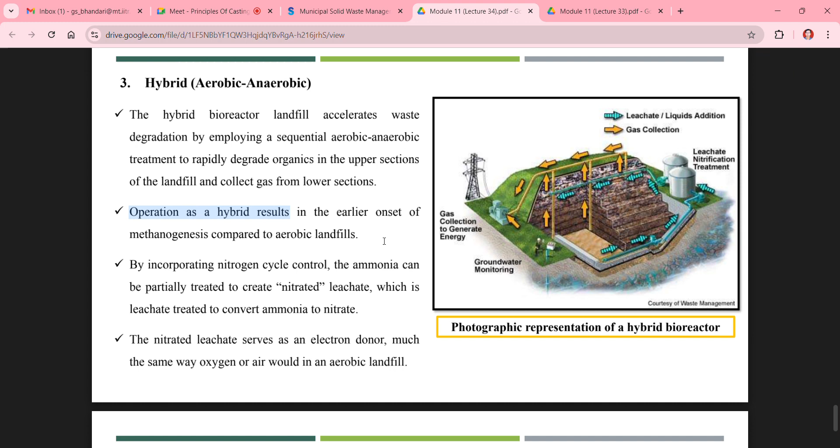Then the third one is hybrid, which is a mixture of aerobic and anaerobic processes. The hybrid bioreactor landfill accelerates waste degradation by employing a sequential aerobic-anaerobic treatment to rapidly degrade organics in the upper sections of the landfill and collect gases from the lower section. Operation as a hybrid results in the earlier onset of methanogenesis compared to aerobic landfills.

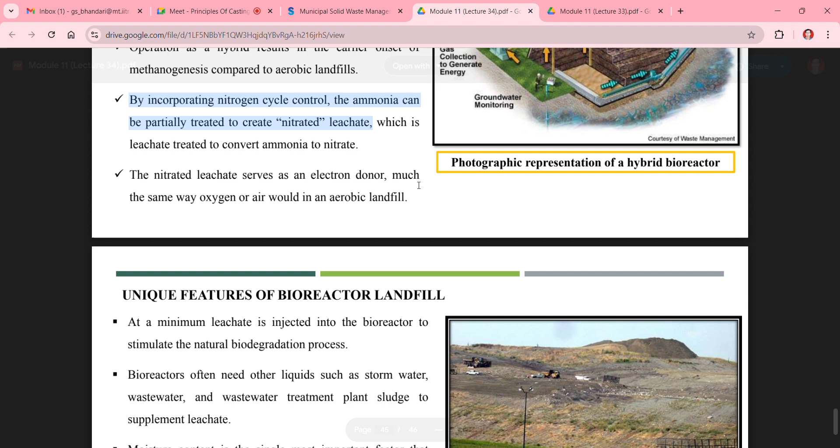Then by incorporating nitrogen cycle control, the ammonia can be partially treated to create a nitrated leachate, which is leachate treated to convert ammonia to nitrate. The nitrated leachate serves as an electron donor, much the same way oxygen or air would in an aerobic landfill.

So unique features of these bioreactor landfills: at a minimum, leachate is injected into the bioreactor to stimulate the natural biodegradation process. Bioreactors often need other liquids such as stormwater, wastewater, and wastewater treatment plant sludge to supplement leachate. Moisture content is the single most important factor that promotes accelerated decomposition, approximately 35 to 65%. Optimal moisture content should be maintained in these bioreactor landfills.

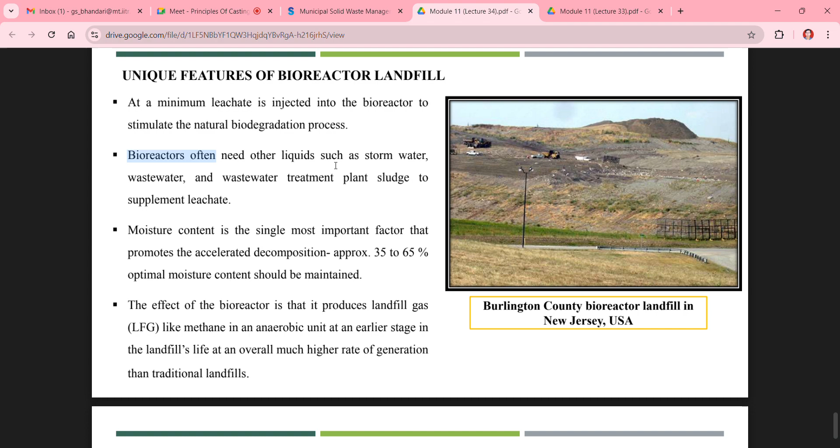The effect of a bioreactor is that it produces landfill gas like methane in an anaerobic unit at an earlier stage in the landfill's life, at an overall much higher rate of generation than traditional landfills. But presently in India, no bioreactor landfill is working. But in some foreign countries like the USA, they are using bioreactor landfills for the proper decomposition of municipal solid waste in landfill sites. So now we will go...

Sir, what is the reason that in India no bioreactor is working? If we talk about India, these bioreactors are going to require a very high capital cost. As of now we don't have any bioreactor technology which has been solely developed by Indian scientists. So we have to buy the technology from foreign countries and rely on them for the operations of these bioreactors.

And the second thing is that in India we use a very minimal amount of fuel created with the help of these landfill sites or composting or anaerobic digestion processes. On a bigger scale, like thermal power plants, they use around 10 to 20% of the energy created with the help of municipal solid waste, but 80% of energy is still created with the help of coal.

Okay, yes sir. Now we will go with some question answers based on today's lecture. Can you see the slide? Yes sir, it is moving.

First question: selection of best ranked sites of landfill is done based on? Site sensitivity index, which includes different factors. Before deciding any landfill site, we have to check its distance from water resources, from human habitat, and it should have proper connectivity with roads so trucks can access the site. We also have to check the soil quality at that landfill site. These different factors combine to form the site sensitivity index, considered before deciding a landfill site for municipal solid waste.